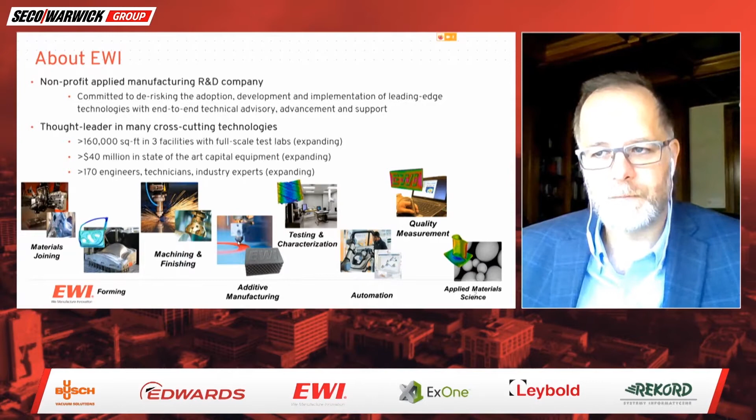Kind of where we come in is, people come to us with their product requirements, and then we help them select the process, select the material, all the post-processing, including the heat treating, secondary machining, finishing, as well as the NDE techniques on how you are going to inspect these parts afterwards. And really, with additive manufacturing, you need to think about all these things to get it to work well.

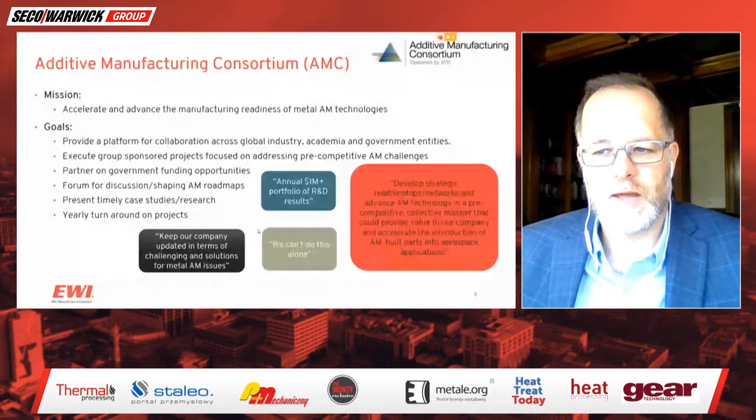We also have an additive manufacturing consortium. This is a group that I run, a group of member companies. We've been going for over 10 years now. Started with aerospace, and had a lot of other industries involved as well. We network and we do research projects together, and so it helps de-risk some of those early stage challenges, especially around metal AM, and so that's another area that we get involved in.

So talking about metal AM, one of the big misnomers with metal AM is it started yesterday, right? If you listen to the media, they're all about, hey, it's early, it's only been around for a few years. Well, no, metal AM really started back in 95. Plastic AM was even earlier than that, back in 87 or something like that. So huge changes over the years, and I would say metal AM has really started picking up speed over the last 5 to 7 years or so. That's when companies started to look at using it, and it's still early stage, and we're going to talk a little bit about that throughout the talk today.

We'll start off with the one that's the most common. You've probably heard of DMLS, direct metal laser sintering. This is one of the ones that gets the most media press. It really is being utilized the most at this point. Basically, you have a layer of powder, a laser solidifying that layer, lower the tray, spread another layer of powder, and build it up again and again. So you're really just welding those layers of powder on top of each other.

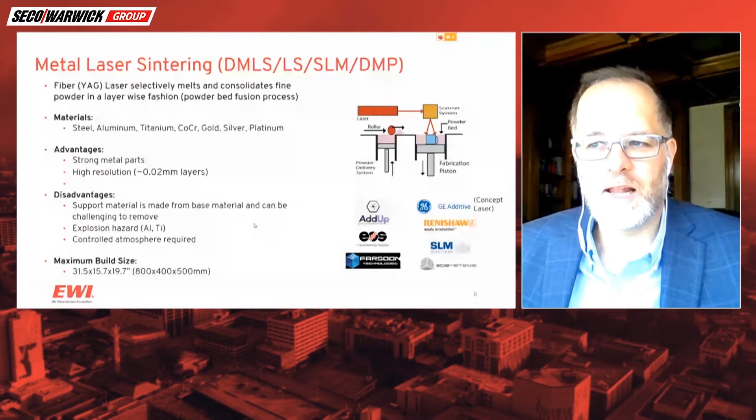Things like dental implants, though, many of those have been printed for the last several years, and that's the way they're producing them now. It's just more cost effective, a better way to do it. So powder bed fusion is definitely an interest to a lot of people.

The other one is extrusion-based material, or binder jetting. And Oliver's going to talk a little bit more about binder jetting, so I'm not going to go into the true binder jetting, but one of the new realms that has come out is this extrusion-based metal. So it's using similar principles to Oliver's ExOne technology, but this is extruding out a ribbon of material.

So imagine like a weed eater cord, but in this case, you've got metal particulates spread inside that plastic binder. And basically, you're just laying that part up layer by layer, and then you go through all the sintering, heat treating processes, just like you would have to do in a regular binder jet process. It's had a lot of media press recently because it's not got hazardous powder, but it's not going to be as strong a part. You're going to have more potential to break between the layers.

The other challenge with this technology is it also builds with a lattice structure inside it. Many people don't realize that. So it's not building a solid part, especially if you have a very beefy part. It's just building a lattice. And so, is that strength going to be representative of your final part? May not be. So you need to think through those things.

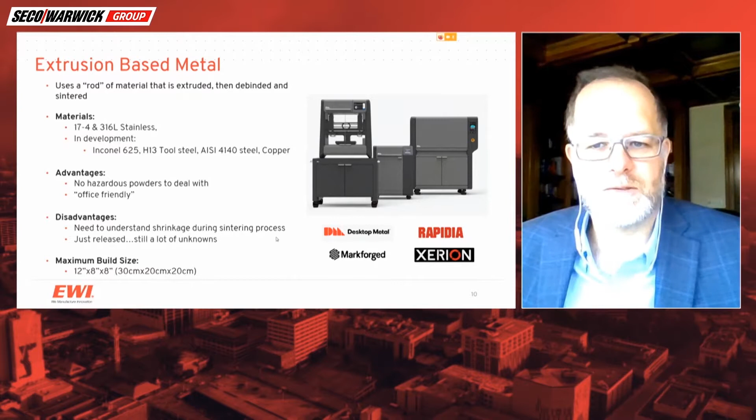Just a couple examples of some of those extrusion or binder jet processes. Parts also do shrink, and Oliver, I'm sure, will talk about that as well. They do shrink, so you need to account for that, about a 20% shrink. But it's very similar to regular powder metallurgy that we're somewhat familiar with.

This is another technology that's new. This is one that actually EWI developed, and we spun off a company called Fabrisonic. This is where we're laying up thin sheets of a film. So basically, imagine just a little wee thin strip, and then we're ultrasonically welding it onto the layer below. And then you build up another layer, do the same. In between those layers, you have the option of CNC cutting to cut out your shape or your geometry.

Big advantage is there's no heating involved here, so you can easily embed electronics into it. You can mill in slots and embed sensors or other items. You can also bond a lot of different dissimilar metals, which really does help and is unique. A lot of the other technologies can't let you do that.

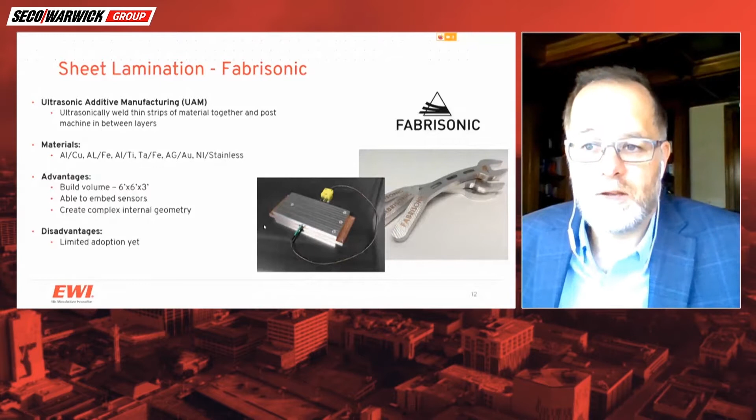Material jetting. This is a new technology. It was launched back in May of 2016. They were at Formnext last year. They're starting, but it's still relatively new. It's called NanoParticle Jetting. So basically, it's based somewhat off the PolyJet technology that was used with plastics for years.

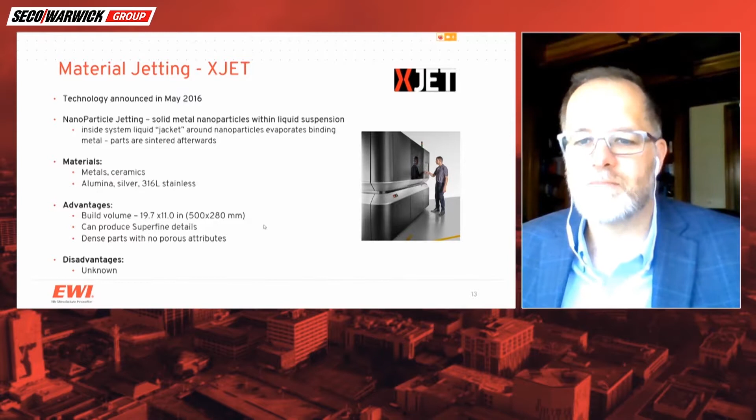They're using an inkjet print head that's basically spraying these nanoparticles down, and then you're sintering the parts afterwards. It gets you really, really fine resolution parts, but they're relatively small. So depending on the geometry, it could be a fit for what you're trying to do.

Material jetting, this is another one. It's a slight variation of material jetting. This was originally announced by a company called Vader, which was bought by Xerox. And Xerox has just now re-released that product at Formnext last year. And it's called MagnetoJet.

So basically what you're doing is you're depositing an aluminum wire into a 1200 degrees Celsius ceramic chamber, and then it's changed into a molten state. And then you magnetically pulse it, and you get that droplet coming out in a very precise manner. It has potential to build at a much faster rate than some of the other technologies, and uses that low-cost commodity wire, so it has a lot of potential. How does it work?

We don't really know yet, because I don't know of anybody that has a machine yet. It's still in that early development stage. And now that Xerox has it, I'm sure it'll come to fruition. It's just a matter of seeing how that technology comes around.

This is another one, Joule printing. So I'd mentioned Digital Alloys that supplied that initial chart. This is one where they're using essentially resistance heating. So you're basically feeding a wire, and then through resistance heating or resistance welding, building up that layer. And it allows you to move continuously and fairly fast. So you get very fast build-up. They also have a camera system that lets them do some closed-loop control to optimize their build parameters.

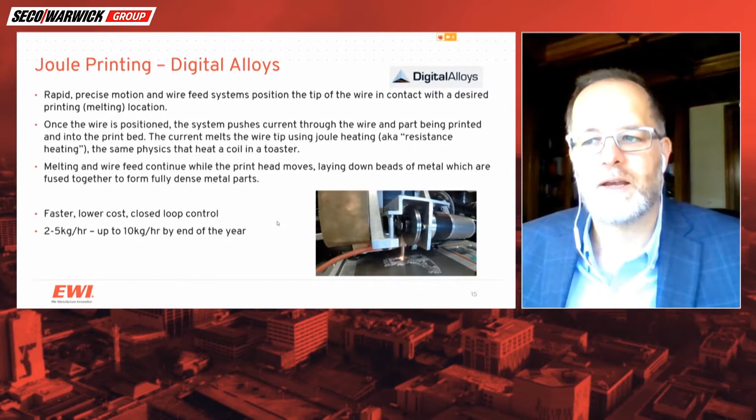And so, again, fairly early stage. They're not planning on launching till late this year, early next. May have changed a little bit with COVID. But again, high build rates, up to 10 kilograms per hour. And I'll talk a little bit about the trends, and that's definitely one of the trends, trying to get faster build rates for these technologies.

Layered powder metallurgy. This is one that Stratasys announced at Rapid 2018. They've been somewhat quiet about it over the last few years. I think it has a lot of potential. They launched it, but now they're really trying to get this technology to work. And we don't know a ton about it. We know that there's a printing stage, there's a compression, compacting stage, but it's meant for aluminum components.

And it's supposed to be very fast, 9 times faster than laser powder bed processes, and relatively easy support removal. The support just kind of falls off the parts. We don't know a whole lot more about it. We think it probably has to go through some sort of a sintering stage. So it's sort of like a binder jet process. But again, there hasn't been a lot of information.

If you Google it, you can probably find a video that kind of explains it a little bit. But again, it's very early stage, but has that potential. And there could be potential for production type volume. And that's really where we're seeing a lot of these metal technologies moving towards.

Cold spray additive. This is another new technology. So SPEE3D out of Australia, they're one of the ones that have been most focused with it. And they provide very fast deposition rates. When they're talking build times, they're often talking in minutes, not in hours or days like we often do in laser powder bed. And so it gets you a near net shape, but does typically require post-machining.

So it's very similar to a lot of the DED processes, or directed energy deposition processes, where you're feeding a wire, you're feeding powder. But you can build very, very rapidly. The other is this technology allows us to build with things like copper. Copper in a lot of technologies is very hard to build with. The SPEE3D system works great. And so you can see a couple examples here.

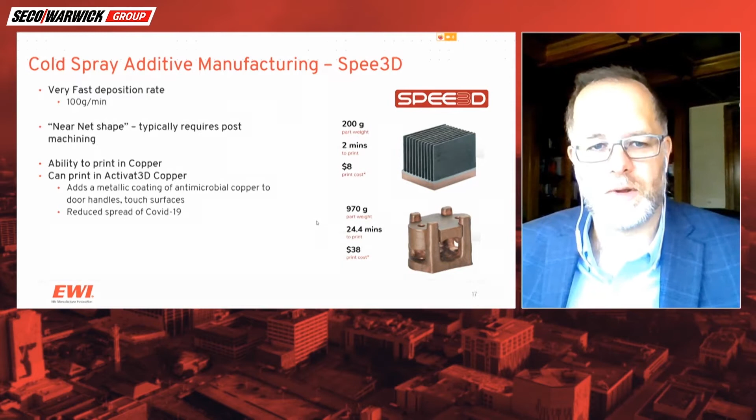So for the last part of my presentation, I really wanted to talk about the challenges and trends in metal AM. This is where most people get involved, get excited about. There's a lot of media buzz out there about what the trends are, but so many people get confused: is this something that's viable? Can I do it?

I just went through really quickly there 3 or 4 technologies. Those are some of the new up and coming technologies. Like I said, there's a whole range of technologies, and it's really hard to know which one makes the most fit. But within all those technologies, there's several trends that they're all kind of leaning towards, and that's what we're going to walk through now. The first is standards.

This is what's holding AM back in a lot of cases, is that we are lacking those standards. So how do we qualify it? We have our injection molding standards. We have our casting standards. We don't necessarily have all the standards for AM.

shore up this. So we're basically working together using consortium, using direct research projects, going after government funding together to basically develop these standards. And that's really one of the gaps, right? A lot of people, if they qualify an AM part, have to do it all manually with their own process. If we can get away from that, that's going to speed up the adoption.

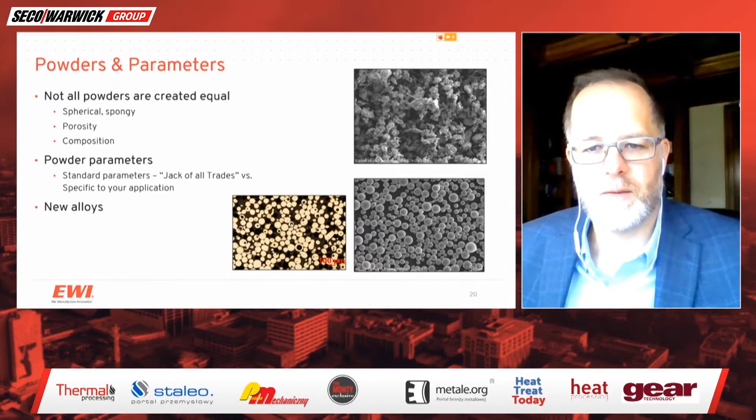Heat treating. This conference is all about heat treating, and I have to mention something. I am not a metallurgist, so I'm not going to go into full detail on it, but this is another area we get involved in a lot. Not me personally, it's our metallurgical team.

And so it's very important to look at your build, look at the parameters, and it does vary a little bit between the technologies. So it's not just you can take a powder and know that you have the right heat treat. You need to take as-built parts and heat treat those and determine what's the optimum one for your process, your material.

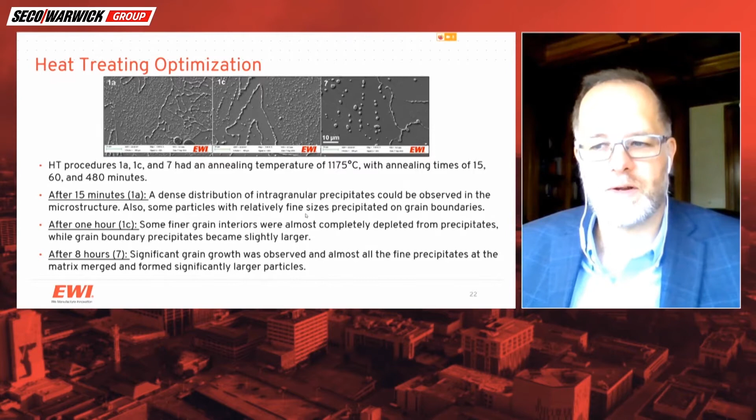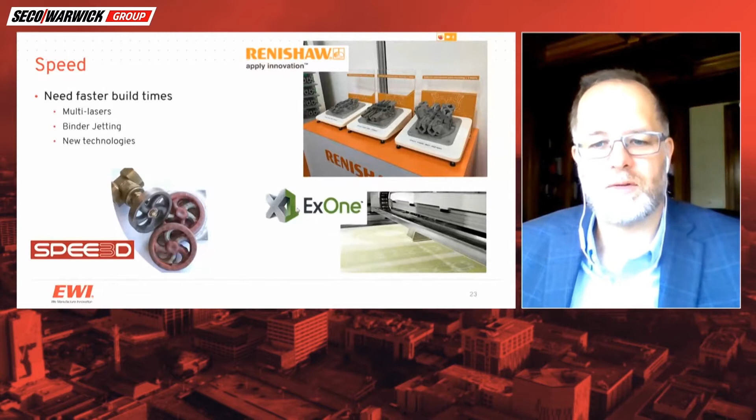Often too, the multi-lasers allow larger builds as well, because you can spread them out over the build tray.

In-process monitoring - this is another area of a lot of research, an area we've spent a lot of research on. If you can sense and monitor your laser powder bed - some of these builds are hours long, if not days long, I know NASA sometimes builds months long - you want to know that something went wrong halfway through, or a quarter of the way through the build. You don't want to find out at the end after you evaluate it that it failed. I'd rather stop the build now and redo it than wait a month, or three weeks, or two days, and then have it fail when I do the post-evaluation.

So looking at those sensors, how can we detect what went wrong? The other avenue is how can you detect it and then correct it moving forward - that's an option as well. We've done a lot of work in some of that, whether for a laser powder bed or for the DED processes.

That we have where you're actually optimizing the laser itself, and it's a great option. There's a lot of research around that. How do you know your machine's right? Or how do you know this machine compares to another same machine of the same manufacturer? Or how do you compare that machine to a different manufacturer's machine? That's the challenge we're getting around on the standard side.

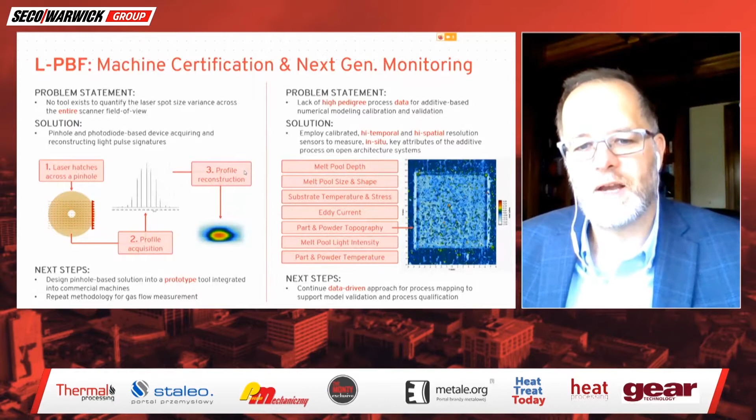And then on the right there is other ways of monitoring. Is there other things we can look at using monitoring systems? Eddy currents, melt pool size, light intensity, powder temperatures. Can we put temperature sensors throughout the build to know where we are? Can we sense the build plate warping or twisting during the build? All those kinds of evaluations will help us know and confirm that we're getting good parts out at the end.

Automation - this is another one. Manufacturing takes a long time to build, but it also can end at odd hours. If you've got a build running till 2 a.m., it would be nice to be able to have that machine automatically shuttle it out of the build and restart the other build without having to have an operator there, and that's one of the trends.

Additive Manufacturing, or Additive Industries, is one of those companies. This is their large machine where basically it'll shuttle it through three or four different stages and completely allow lights-out involvement. When you come back in the morning, you clean up whatever stage it's at, and it keeps running. There are other companies starting to come out with similar automation, whether standalone automation on the side or integrated more like this system.

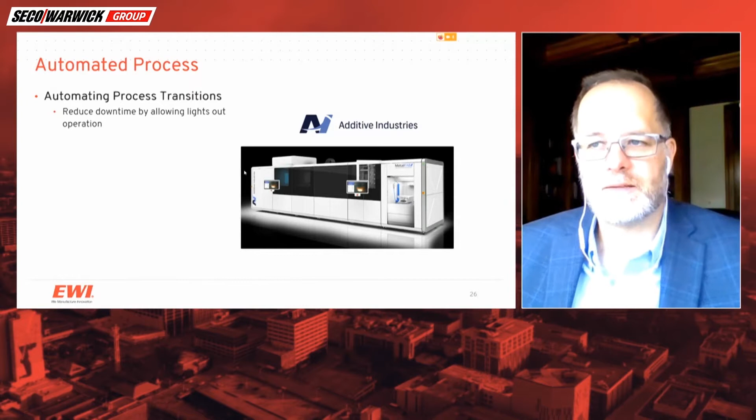Now you've got laser powder bed capability at a much lower price point. Smaller build size, 5-inch by 5-inch by 5-inch, but a lot of the time that's the size parts we're building anyway, so this type of technology can make sense.

We're also seeing more and more vendors come in—some Chinese vendors, some European vendors as well, many getting into this market. As we get more competition and more vendors, I think we're going to see more and more companies come to fruition.

Software tools. Simulation—you're going to see part deformation, there are lots of different simulations you can do. You can determine the residual stresses. Imagine you're building a big solid block up—it's going to warp, it's going to twist. How do you qualify that? How do you know what's going on?

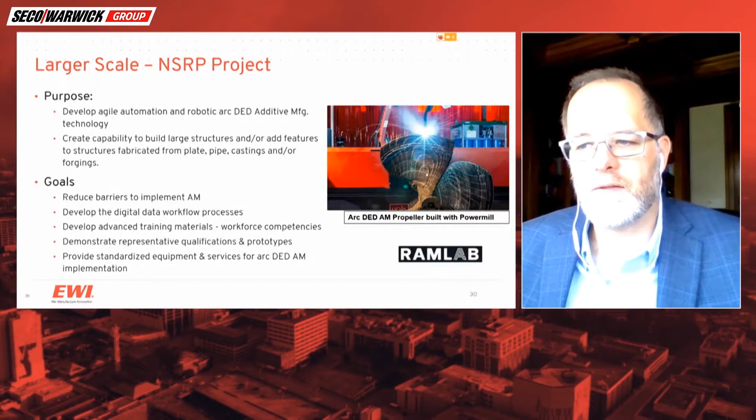We have a large gantry-based system at our facility, and we're in the middle of researching an even larger scaled system. To put it in perspective, this propeller is almost a 2-foot diameter blade. The new system build size is 25 feet by 15 feet by about 9 feet high—much larger parts, but again more near-net shape, not necessarily final build size.

One of the last struggles we have is training. How do you train your employees? Most universities and colleges just don't have good training materials available. Most of the time, if you're at a college, it's a course or a series of courses. We're starting to see some colleges with a manufacturing minor you can get into, and a few looking at additive manufacturing programs, but they're still very early.

So how do you get the people you need? Most companies are having to train employees internally. The other challenge with training is how a company comes up to speed—how do you weed through all these technologies? There are a lot of different technologies out there, and it's a real challenge.

I've been in the industry for almost 20 years, and every time I turn around there's another new technology, another new company doing something slightly different. The challenge is they all call their technologies almost the same name, just a little bit different, so it's hard to know if that's just the same type of technology with a different name.

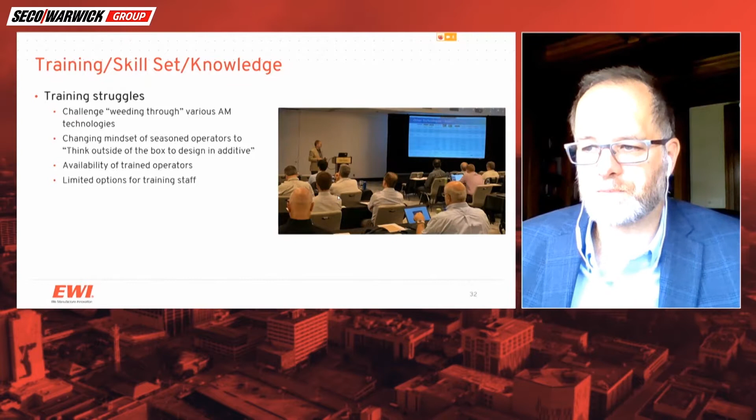In summary, there's a lot I've went through here, a lot of trends. Things are changing very rapidly in the industry. The first thing I can say is don't be afraid to try it. Try and get involved. Can't machine it? Get out, find a bureau - lots of bureaus around the world that will print parts for you.

It's a great way. That's what I started with, right? When I started with Christie 20 years ago, we started bringing in parts. Then we realized we're outsourcing enough parts that it's better for us to bring the technology in-house. Once we brought one technology in-house, we started expanding and bringing all the different technologies in-house. The other challenge people have is they buy one technology and expect it to do everything - not every technology is going to be a fit.

So you're best to fit the technology to your industry for the most benefit. Seek out those knowledgeable experts - companies like ours, and others out there, that can help you determine what's the right fit, what's the right process. Build out those early prototypes.

The other point is get a champion. The companies I've worked with that have had the most effect are the ones that have that senior person within their company who's phenomenal and has really grasped what additive can do, and is then able to sell it through the company. That's really going to help get it adopted. Break down those barriers in your company to allow AM adoption, whether it be cost or structure.

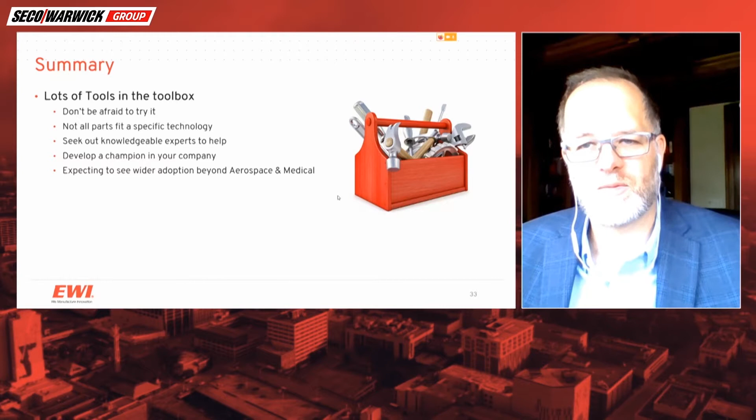It's changed so much in the 20 years I've been doing it - from early prototypes, which were weak parts, to now fully functional parts integrated into production fixtures, metal parts that are fully functional and meet aerospace and medical grades. As that gets more evolved, as standards get developed, we're seeing more and more companies get involved.

I think it's something to look at. If you haven't looked at it, feel free to reach out to me or to others - we'd be happy to help you with that. So thank you.

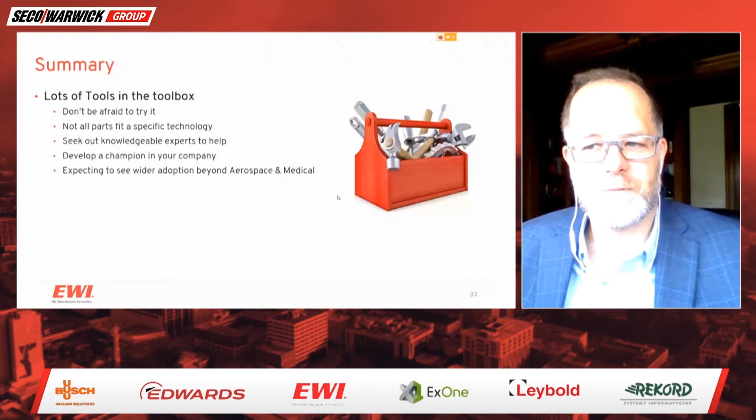Well, Mark, thank you very much for your knowledgeable presentation. There was an astonishing overview of, I believe, the entire technology available in the world. So thank you very much for it. Actually, I've got a few questions about the presentation.

The first refers to the future of additive manufacturing. We were saying a lot about the past, about the present, and I believe the future is quite bright. But in the long run, what do you think? In which direction will it go? Shall it be more a kind of niche technology for niche production, or maybe it will totally dominate the traditional way of production that we know today? Or maybe somehow it will coexist with current production standards that we know. What's your guess about that?

So I don't really see AM completely eliminating our traditional manufacturing, right? It's hard to have AM compete with traditional casting, traditional machining. Again, if it can be produced traditionally, it's probably a better fit to produce that part traditionally. Where AM fits in is where you can combine parts together. You can make geometries that we can't cast or we can't CNC machine. That's really where the fit is. And so that's where I see it being more adopted as more and more people get into it.

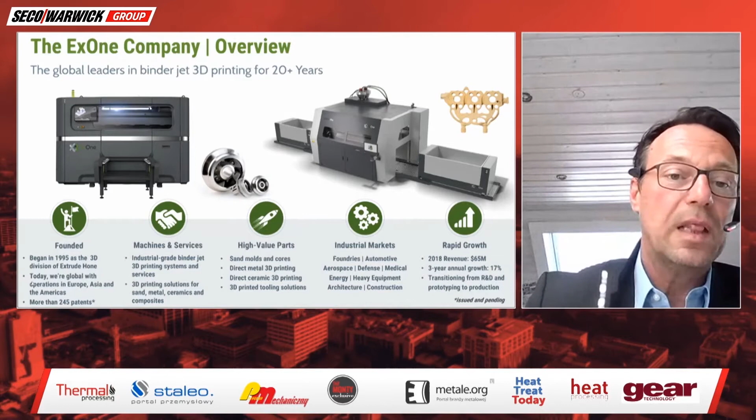We do that not just for metal, we do that for sand printing. On the right-hand side, you see a sand printer, and on the left-hand side, you see a metal printer. And I will talk about that a little more. So these are the markets where ExOne is basically focused on. On the left side, you see 3D sand molds and cores for metal casting. So the printers printing sand and big cores and molds.

And then in the middle, we have what we call direct metal 3D printing. That means really binder jetting into a powder bed of metal. And then the next step is curing, depowdering, and sintering. Then, as it is available in powder form as well, there is ceramics. And as ceramics can be sintered as well, we can print green bodies, green parts with our technology and our machines as well. So these are the three markets ExOne is covering.

Where are we? We are in almost the most important areas in the world. That is Asia, of course. It is in the middle of Europe, that's Germany in that case. And we are present with our headquarters in North Huntingdon. So this is where we have our bases, and the area which we can cover, you can see it's quite all over the world. If somebody is interested, we can cover his needs.

As a decent company, of course, we do have collaborations in place with universities and with other companies, because in additive, I think that is what Mark has shown as well, it's important to understand it's about doing that together. The market is not mature, it's really new, it's a young market. We need to do networking, we need to push, we need to train people and to educate people, and therefore you need a network. You need universities, you need other companies collaborating to make the push, because nobody can do it on his own. That's not possible in that area of applications of technology.

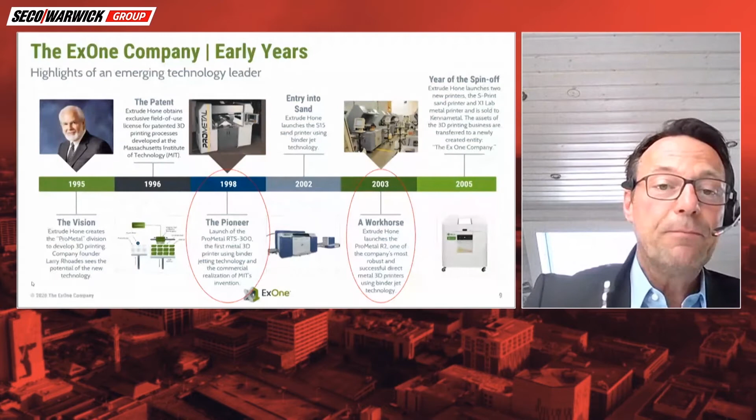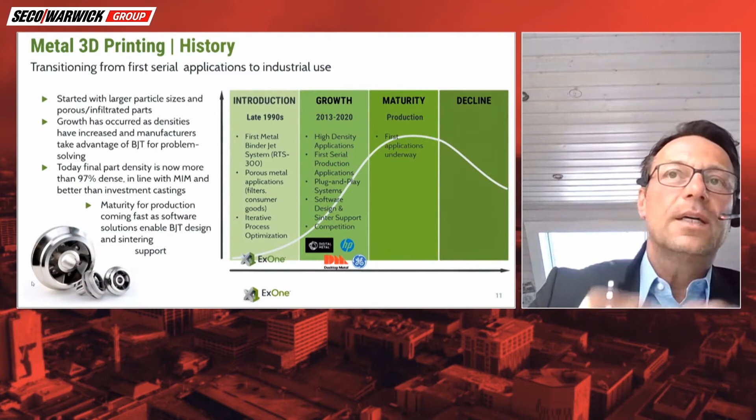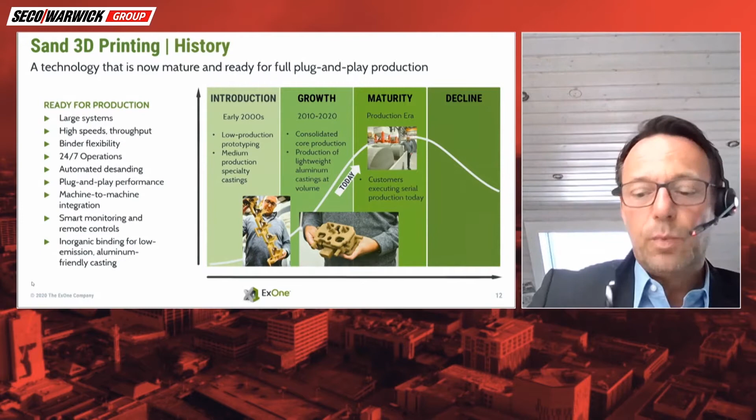Well, the history of metal 3D printing, everybody knows that kind of graph, where it started and where it hopefully will go. And we are not as advanced as we are in the sand business. Sand printing has been around a little longer. You see that we have already reached that kind of maturity. There are machines placed in companies that run almost 24/7 operations. So this is the ExOne company: we build machines for sand printing, we build machines for metal printing.

And how does binder jetting work? A little overview, and a little overview of where it hopefully goes. So basically, we have a powder, we have a binder, and we print layer by layer. So this is the core technology. And of course, it's not as easy as it looks, as always when it comes to AM. But the nice picture here on the right-hand side is, same as Mark has predicted, that we have higher build rates and low operating costs with that kind of technology. There's a big opportunity to grow into the market with that kind of technology.

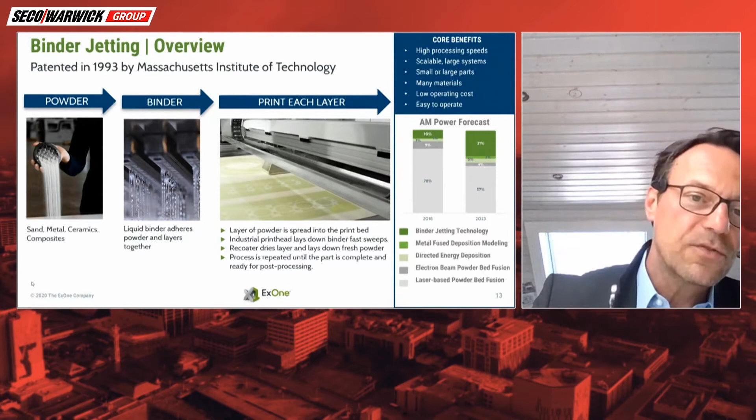With binder jetting technology, there's a lot of space, and there's a lot of education and training necessary to tell people what is behind that technology. And no, it is not replacing milling and drilling. It is a niche in a niche, but if you find the right place, it is a nice technology.

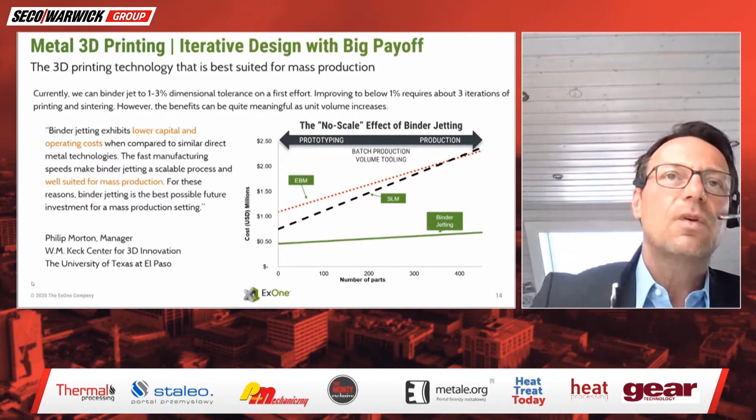Well, of course, most of the people have talked and have seen some of these predictions where metal 3D printing will go, and where is it already ready for mass production? It's kind of still a learning phase. Some technologies are more than others.

Probably binder jetting is a little closer to mass production compared to powder bed fusion, laser-based, or maybe e-beam based. But at the end, there's room for improvement for all of us. There's a big industry out there which hopefully will understand what is the advantage and the capabilities of that kind of technology.

Let's go through. Mark has started to tell you already about additive manufacturing or 3D printing. That's a little different. If you ask Google, hey, Google, tell me what is 3D printing, then you get that kind of pictures. That means it's more plastic related, not that much metal. The interesting thing is that if you go, hey, Mr. Internet, what does additive manufacturing mean? And then all of a sudden, you get more pictures and results, hits metal related.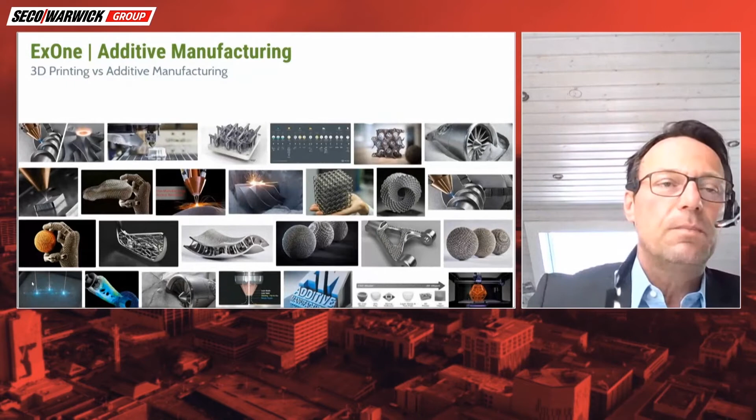Just by giving you those two simple examples shows, I think, that the landscape of 3D printing, of additive manufacturing, is so diverse. There are so many technologies. I'm really impressed by how EWI is doing it, because there are so many new technologies coming around the corner each day, and you need to cope with that in terms of, as Mark said, is there a difference? Is it the same name almost, same description almost, but a little difference? So it's a big landscape.

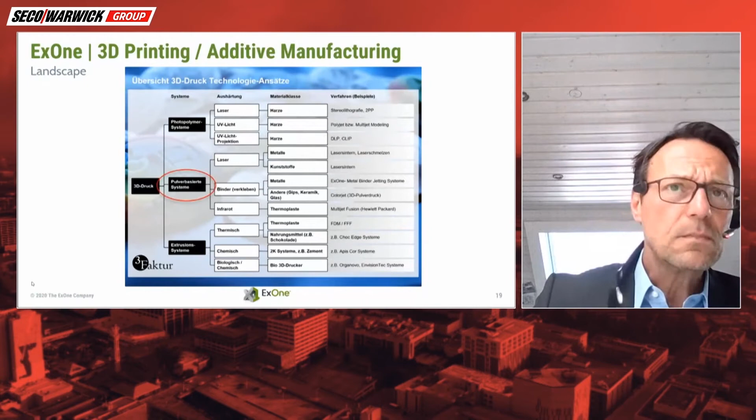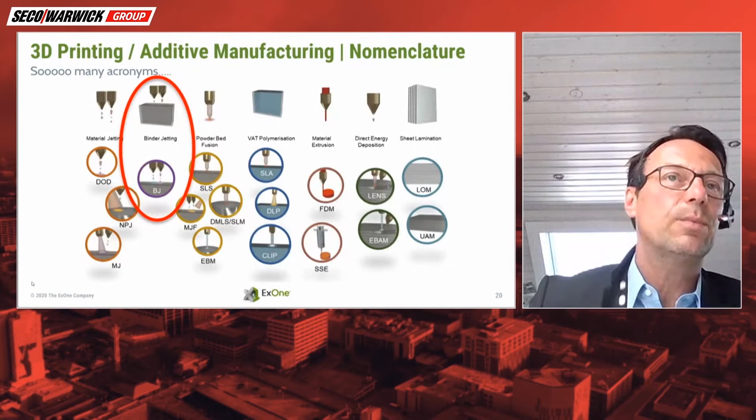At the end, what we are going to concentrate on today is powder bed combined with the binder jetting technology. There are so many abbreviations, acronyms flying around for binder jetting, powder bed fusion, and personally I sometimes don't know each and every one of them. So we are going to concentrate on binder jetting, and there is much more out there, which is good. On the other hand, it's sometimes hard to explain where the differences are, where the advantage or the disadvantage is. Let's go for the binder jetting technology, most simple.

There's a powder bed and there's a print head, which is printing the binder into the powder, the binder which is kind of a glue, gluing together the particles. And as this is kind of too simple, I will show a little video based on the sand printer, but it gives you a flavor of how the process works. What is important is to understand the recoating system, how the recoating is going to be done, and to jet a droplet of binder specifically, precisely where you want to put it into the powder bed.

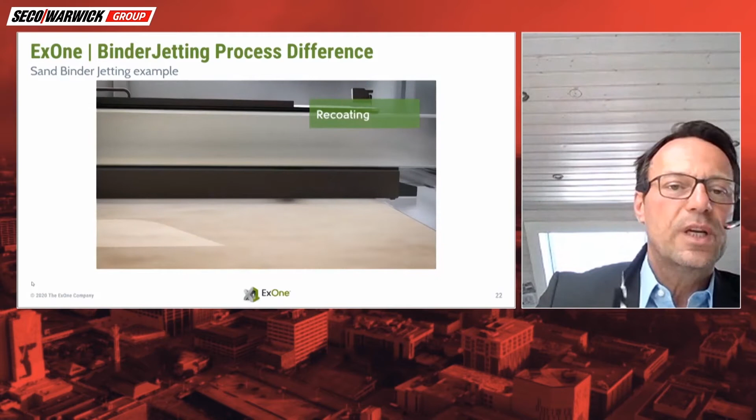So the first step of the process is the recoating process. We need to put layer on layer, layer by layer, and of course that video is kind of artificial because the particle sizes are all the same, but it shows how it works, that we put a layer of powder on top of the other layer of particles.

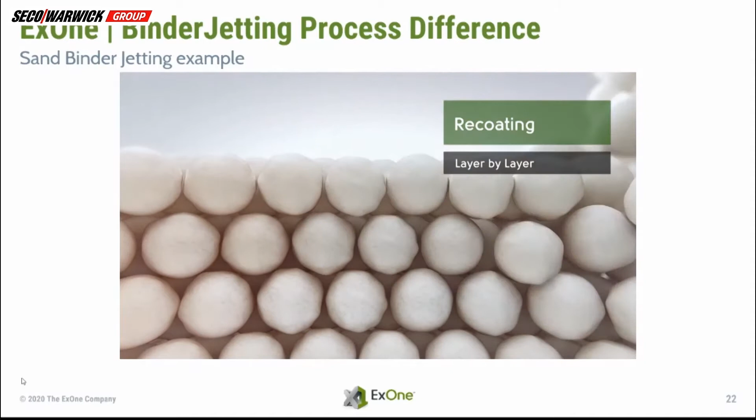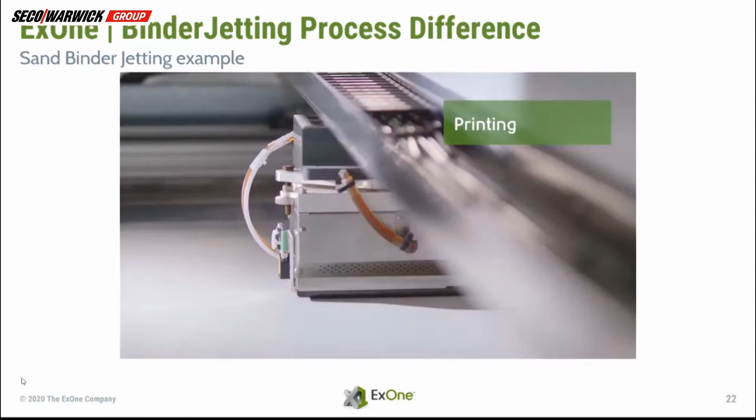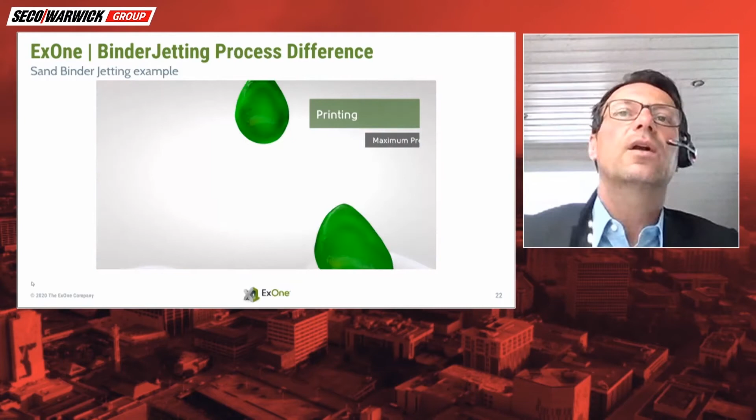The next step is then firing the right amount of droplets, the binder, on top of that layer, at the right place as we want it, and this liquid binder is jetted by the printhead into the powder bed, and it just kind of glues together the single particles to a green part, which gives us the ability to cure that green part, and then we go into the sinter process to sinter that green part.

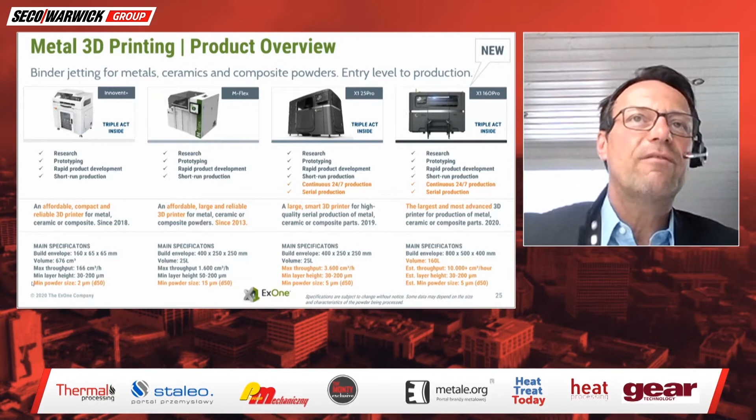Basically, all of them have what we call the triple ACT. That's a technology I will explain some slides later, which enables us to spread out, to recoat the powder the way we want, and to have the same technology in the R&D machine, which we call Innovent Plus. And then we have the same recoating technology in our production machines, which enables scale-up from R&D into production pretty smoothly and pretty linearly, which is our target: to give customers the possibility to translate their R&D results into production.

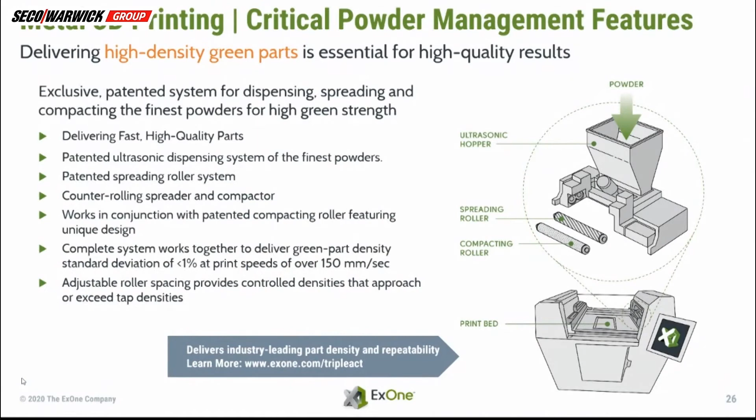The ACT technology enables us to handle a powder, and we have learned by Mark's presentation there is a lot of difference in powders, and I can tell you he's so right. The powder people are more familiar with, the most optimal powder, is very spheric. There are no satellites, it's flowable, and all these things.

But at the end, if you want to go into a more productive way of producing with binder jetting, you try to go for MIM powders, metal injection molding powders, which typically have a D90 of 22 microns. So that means it's quite a very fine powder. And physically, fine powders tend to stick together. The particles are sticking together. They are no longer that flowable.

And therefore, we have invented this kind of technology, which enables us to recoat even very fine powders. So we have an ultrasonic hopper, a spreading roller and a compacting roller. This combination of ultrasonic hopper and the two rollers gives us the possibility to recoat even a very fine powder. And this is of importance if you want to decrease the cost of the powder in the future, because MIM powders are available, as metal injection molding companies use tons of that material very often, so we can use the same powders with our technology.

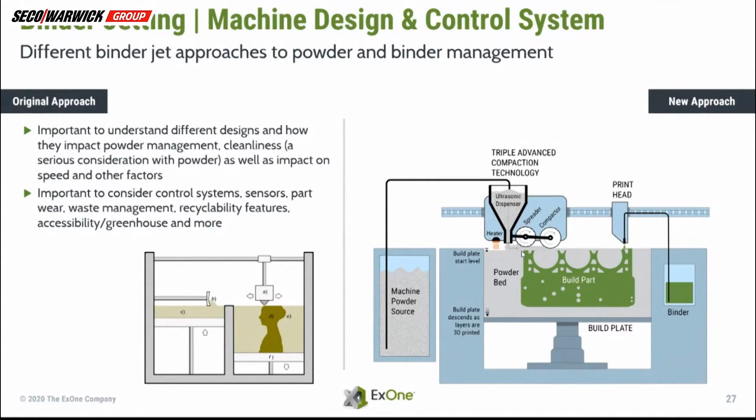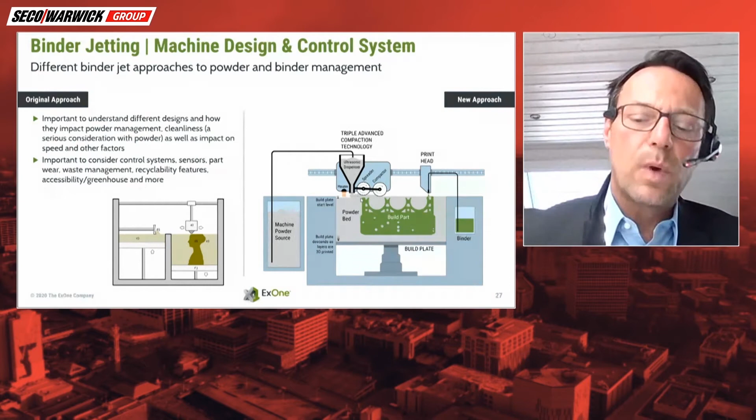And it's a very constant and very homogeneous way of spreading out and recoating the powder, which is important if you consider that at the end we will build a part which has to go through a different process, which is the sintering process. And the better, the more stable and more homogeneous the green part is, the better the result is going to be after the sintering process.

Let's have a quick look at the machines as such. The R&D machine we call Innovent Plus. It has a small build room, but most of the time enough to make a small part, to do the first tests, to do the development work with one or the other material. And the nice thing here is that you can change over the materials quite easily. If you go for an iron-based alloy, or you want to change to a nickel-based one, you can change with a clean time of less than 2 hours.

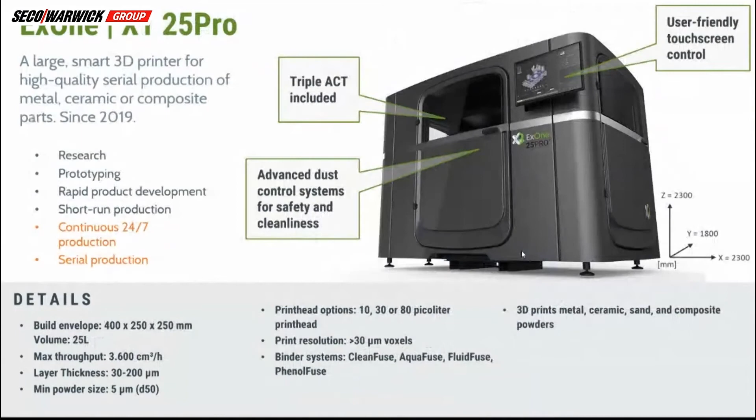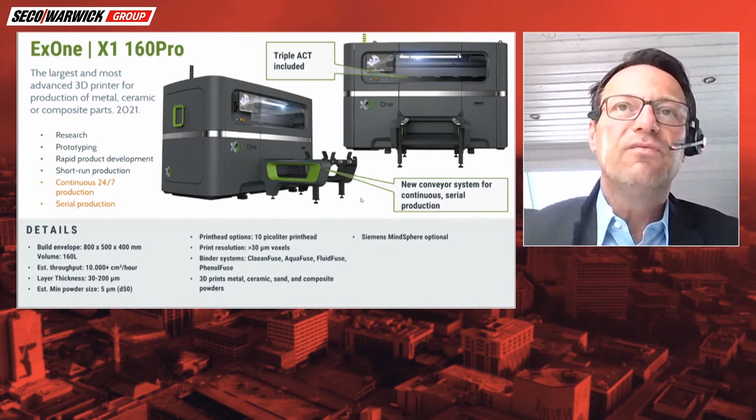The big machine, which we call 25 Pro, the 25 is related to the volume of the build box, which is in that case 25 liters. And this is really for mid-size production of parts. If you want to go one step bigger, we have another machine in place, which we call 160 Pro. As I said, 160 liters is reflected by the name. So that's the build envelope, the build volume. That's really mass production, high volume production in binder jetting technology.

I still want to mention the machine which is called M-Flex. That is more for people who want to build maybe filters, where you have a more porous, not a highly dense material at the end, and then you can cope with that challenge using the M-Flex as well.

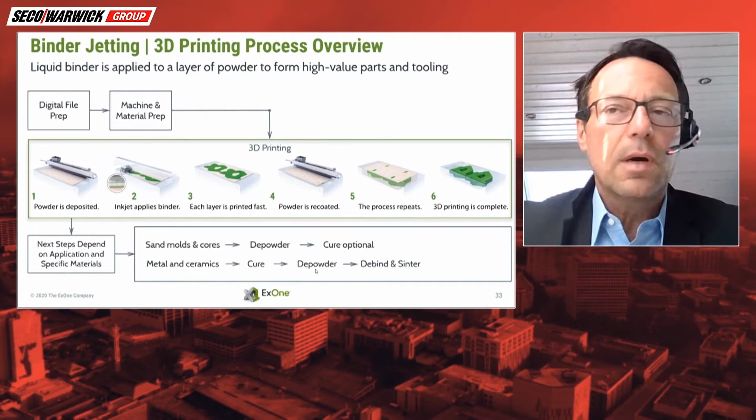So the core business of binder jetting of ExOne is the binder jetting technology, how to print a part, how to handle that process. And then the next step, the sinter step. As the MIM industry is doing sintering since ages, there's a lot of knowledge out there, but it's well known that sintering is not as easy as it should be. And there's a lot of experience necessary to sinter a part properly. As we have heard, because there's shrinkage in place, there's different reaction of the part given by gravity and other things. We will talk about that a little later.

And here, most of the time, you need a consultation and some backup and support from the furnace community, because it's really depending on which material you want to sinter. Is it a 316, so a stainless steel, or you are more interested in nickel alloys, or maybe in ceramics? So there's a lot of room for discussion at the end. It depends really what material you want to produce.

But let's go back to the first step, which is the digital preparation. Everybody knows that AM starts with a digital file, an STL file, and to create such a file, that's probably not the problem nowadays. We have a lot of computer power available. We can do that. More difficult to me is to utilize that new power. In the old days, in the classical approach, we did the CAD, and then we say, okay, well, we need to go back and redesign. But actually for AM, we could use computer-aided engineering. And so we have to simulate already ahead how the part may look like to accomplish all the tasks.

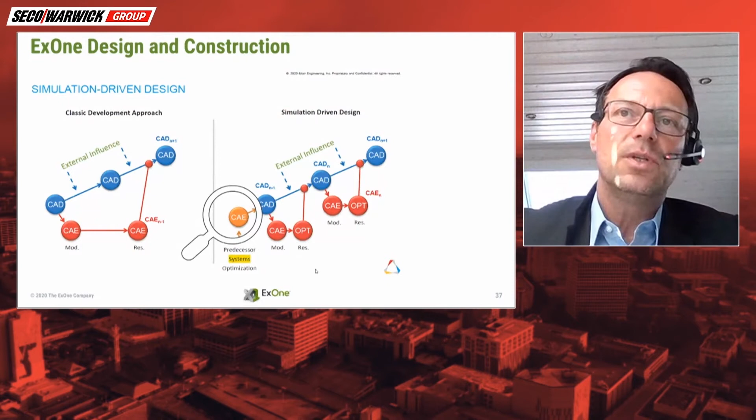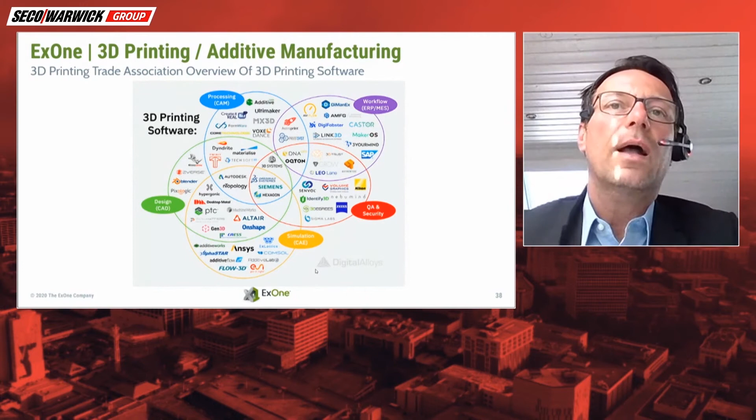The other thing is that software is a thing, and as you can see here in that screen, coming from Digital Alloys as well, there's so many softwares and so many approaches that bring all this additive community together, and it's to pick and choose what is the best one. Where am I gonna start? This is sometimes not easy because it's so complex. There is not a one size fits all available, but you have to go through that, and there's lots of companies out there to help you go through, because starting from scratch, it's not as easy.

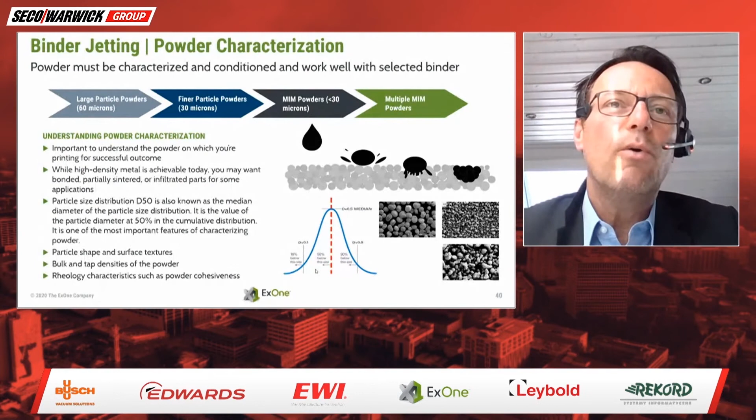Let's talk a bit about the materials. The beauty of binder jetting is that you can use almost every material as long as you find somebody who produces a proper powder. In the early days, we started with large particle powders. Nowadays, we are able to go for, as I said already, MIM powders, so very fine powders. And why is it important and why do we go for finer powder, smaller particle sizes? Because the sinter process afterwards, if we talk about metals, is a bit easier if it's finer powder, but then on the other hand, it's not as easy to recoat them.

So here we are back again to the technology we have embedded in our machines, which we call ACT, because we want to go as fine as possible in terms of powder particle size, but still we have to cope with the hurdle of being recoatable. Can the powder be recoated in a proper manner? So that means the powder is an important part of our process. And I'm really glad that Mark pointed out that powder is not just powder. You see here some pictures as well. There's very spherical powder. There's a more edgy powder.

All this shape of the powder will influence how the droplet is going to be penetrating the layer you have put on top of each other. So it's important that you understand what raw material this is. It's not just whether it's a stainless steel or nickel based, it's also how the powder size and the powder particles look like.

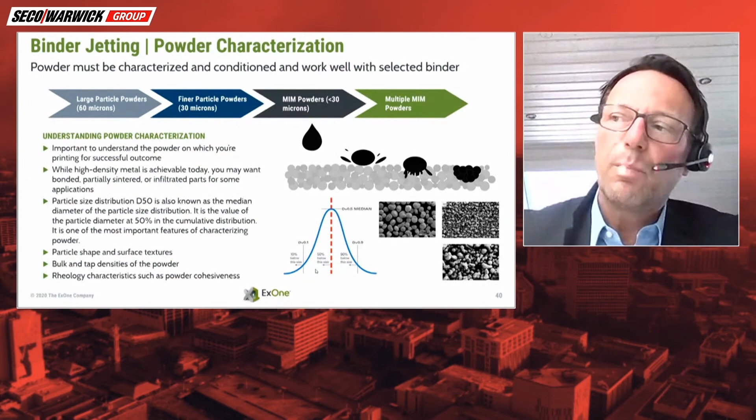Therefore, we as ExOne have defined a way to test the compatibility with our process, with some little methods, like how the particle size distribution looks, or how the flowability of the powder looks. If you look into the specification of powders, you will easily recognize there's a lot of things which are maybe over sophisticated, but you need to really understand what raw material you put into the machines.

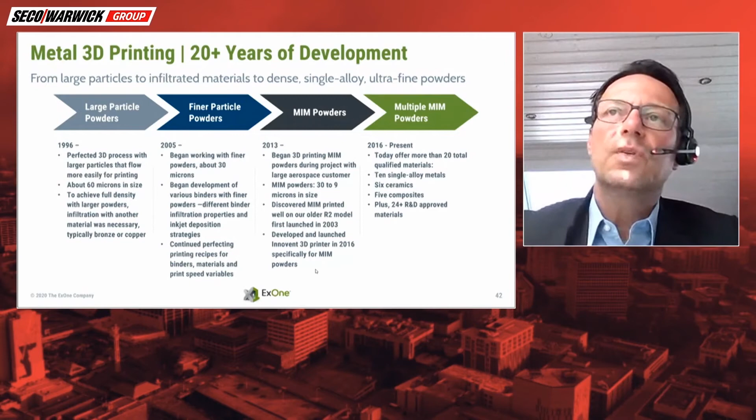And that's not just with binder jetting, it's the same if you go for powder bed fusion with laser or with electron beam. So ExOne went through this variety of different powder particle sizes, and now today we are able to use multiple MIM powders, which gives us a very broad material portfolio to choose from.

We have defined some levels of powder or material qualification. If we as ExOne qualify a powder through a third party, we call it third party qualified. That means an independent laboratory has tested all the steps and properties of that powder through our process. And if we can meet the typical specifications or standards, we reach the MPIF standard 35 with the powders or materials we have qualified as third party.

Of course, there are other powders. We have customer qualified materials, which means a customer of ExOne has tested and produced powders and materials, coming to a proper result. So the customer has proven by his process, by his choice of material, that it works. And of course, there's R&D qualified powders and materials.

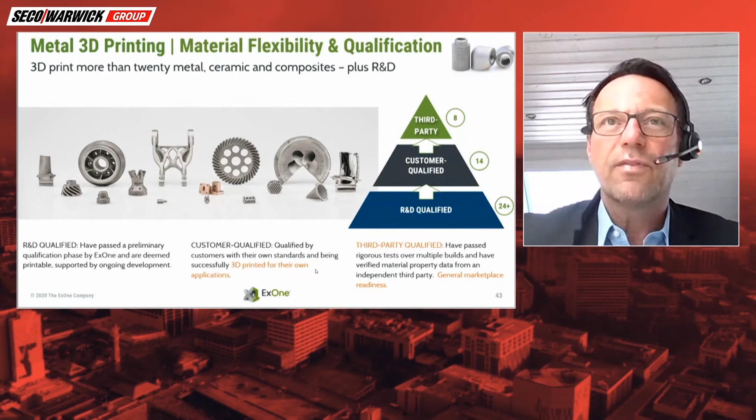There are so many of them, which explains why not every material existing can be a fully third-party qualified powder. Because if you're going to do that, it's a report by an independent company telling us this is tested by tensile, by hardness, by impact, and all the other things that is really committing, tested against the MPIF standard, and if we are successful by doing so.

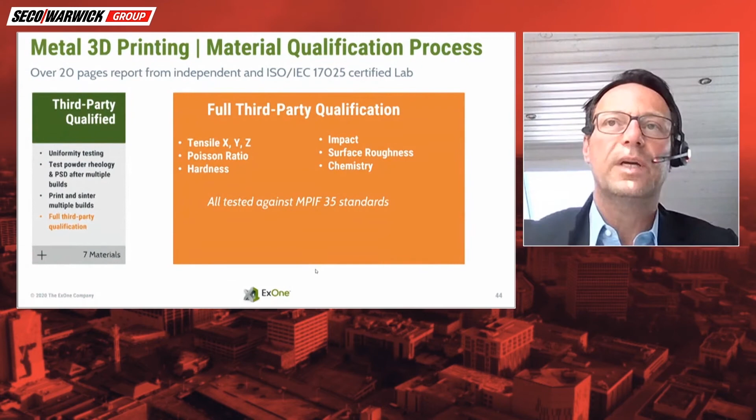Third party qualified, for instance: 17-4 PH, 316L, M2 tool steel, and very new is the Inconel 718.

If we have a quick look to customer qualified materials, then there's by far more to come. There's the ceramics, and beyond even metal ceramic composites, silicon carbides infiltrated with silicon.

So this is sometimes the beauty of binder jetting, and on the other hand it's a burden, because to pick and choose the right material for the right process, for the right application, is sometimes offering so many opportunities and so many choices that it's not easy to make your own judgment on what is best.

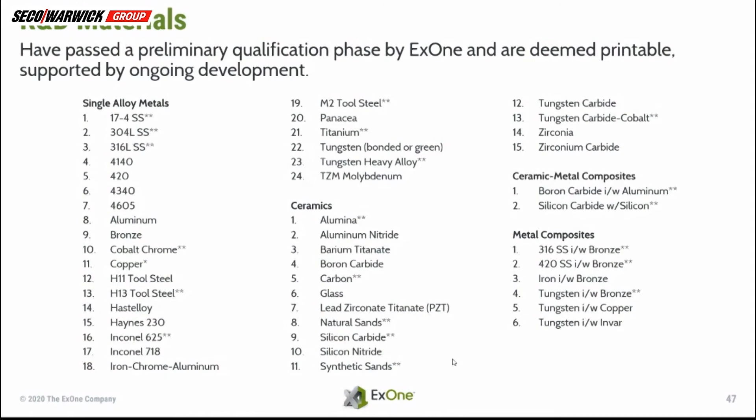Here you see just a small number of parts made of metals. That's not everything we have tested - we have tested hundreds of them, but it depends on what the customer needs. Sometimes it's his own developed alloy, or it's a very standard alloy, like maybe a cobalt chrome or an H13.

You will reach, as I said, the typical properties of the metals, assuming they are produced by a MIM powder or a MIM process. This goes for all the others as well, for the M2 steel.

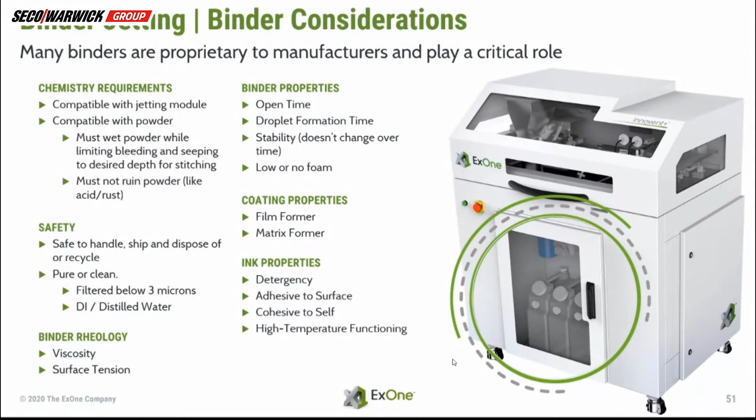One thing, if you talk about materials, is the powder, the metal or ceramic, and on the other hand it is about the binder. It has to fit together. So it's not easy - it sounds sometimes very easy, but you need to find the right binder for the right material to achieve the best properties you want.

This is why we as ExOne have 4 binders. Every binder has its pros and cons, depending on what is your target application, what is the alloy you want to print, you want to sinter, and what is the application behind. So we have 4 of them, because we have understood that there is no one size fits all.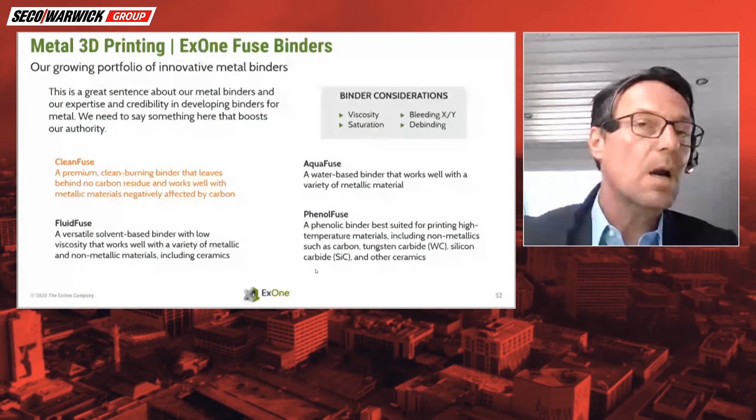One binder giving all the properties you want - and probably there's by far more possibilities to develop other binders. But at a certain point in time, you have to decide whether you want to stick with a solvent binder or a water-based binder. Some even may choose the phenol binder because they want to go for a tungsten carbide. Well, the printing as such, the video has explained it properly how that works.

But it sounds very simple, but sometimes it's not as simple if you go through the process. There's the drop formation, so how the firing of the printhead works, and how big the droplet has, and then how it hits the surface of the powder and starts to penetrate. Because you want to make it penetrate only as deep as you want it. In the Z direction, we don't want it to bleed out. The same comes to wanting to form a voxel and not bleed out left and right. This is the difficulty to do binder jetting in the right way.

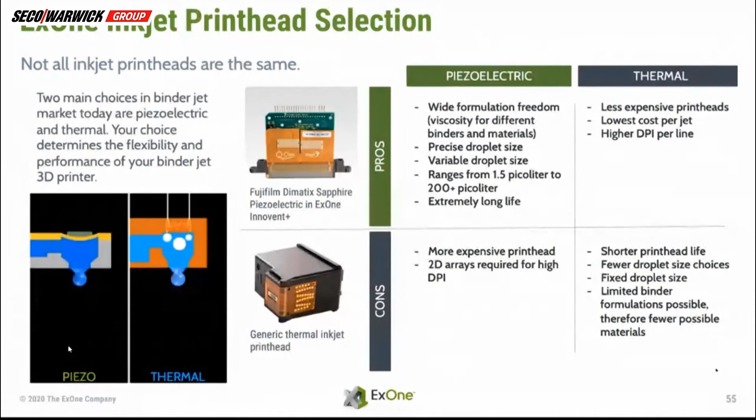What we have decided is to use piezo technology rather than thermal technology for firing the droplets into the powder bed, because we think we get a more precise way of printing, or creating our droplets.

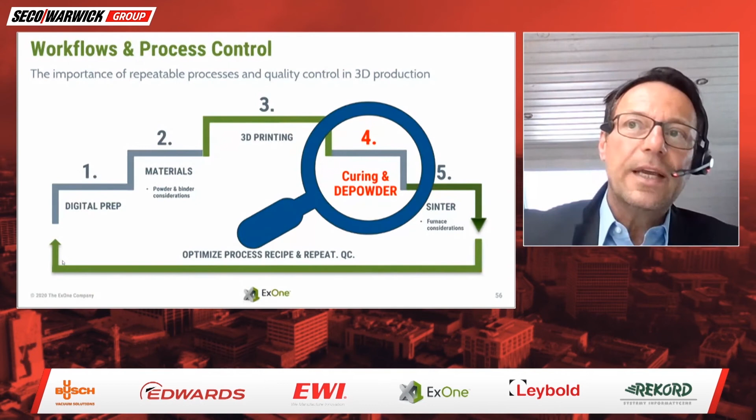Curing. And now that's going to be curing and sintering. You can do binder jetting, but without the depowdering, the curing, and the sintering step, binder jetting, the green part means nothing. So you need to post-process. You need to debind and to depowder and then sinter a green part which we have printed. It's important to understand that this belongs together. One thing is printing, the other thing is then the depowdering and the sinter step.

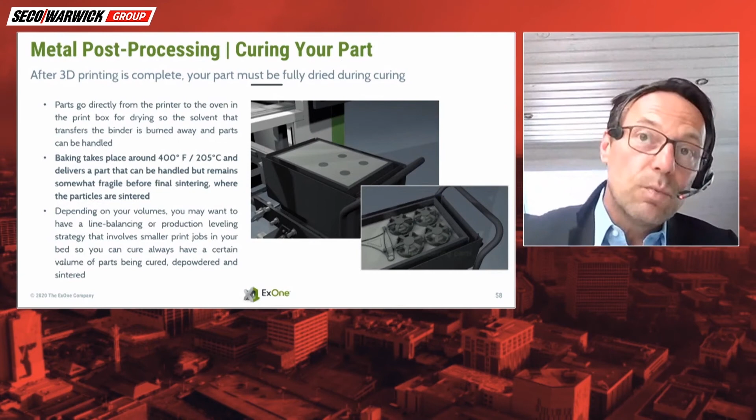So curing your part is necessary to cure the binder, so curing the glue between the particles to make a solid part which you can handle. It's still not solid as you think, because it's in that green state. That means it has a tensile strength of something like 6 to 8 megapascals, so it's kind of fragile. And as we don't want to have a fragile part, after the depowdering process, we go for the sinter process.

And why is depowdering so important? Of course, because if we go into the sinter process, each and every particle which is in the part, if there's remaining powder, it will be sintered to a solid block. So we don't want that. So we have to depowder in a proper manner.

Sintering. Of course, the furnace consideration is very important. I'll give you an example. If you choose to go for stainless steel, and you think in the early stages you want to start printing and sintering a 316, and the next day you think about maybe going for a 17-4. I think that sounds similar and even very familiar, but if you want to achieve the best possible property of a 316, you should go with hydrogen or high vacuum into the sinter process.

And there's so many ways and combinations of material and the way you're going to sinter that you need an expert telling you, like the furnace companies, like Seco Warwick, how to do that. It's not us as machine builders. As we build the printers, we can do the binder jetting process, and for the qualified materials we know how sintering works. But if you choose and pick another material, that's a different animal, and we need to find out how to sinter that in the best proper way.

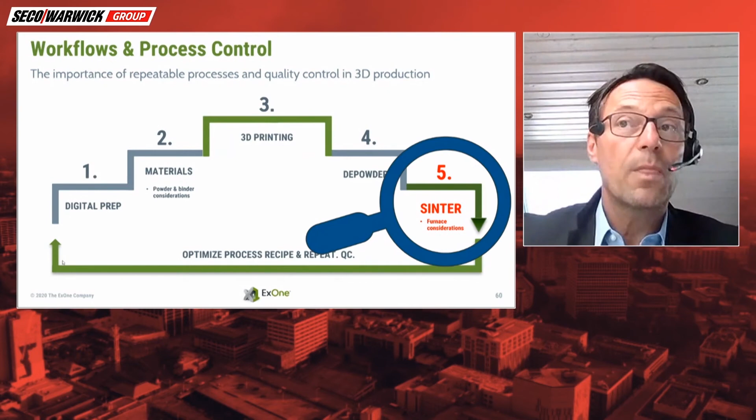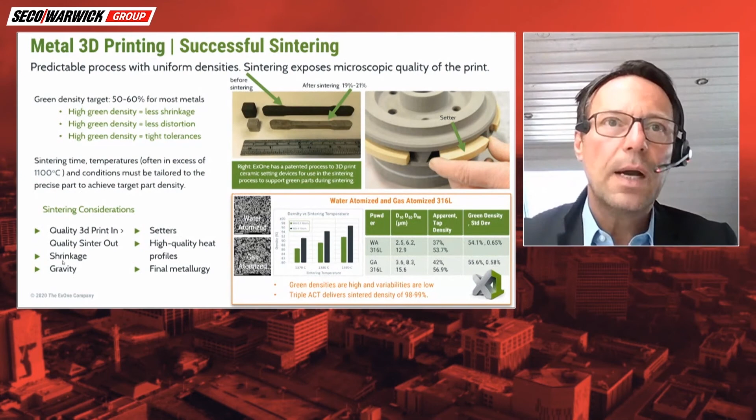Everything which comes along with shrinkage is as well belonging to how you start. That means how the green part, the green density, looks like. And this brings me to the point why we have decided going for MIM powders, because there we can reach a higher green density that brings us less shrinkage and, even more important, tighter tolerances and less distortion. On the other hand, you need to already consider before you print how that distortion might look like while you go through the sinter process.

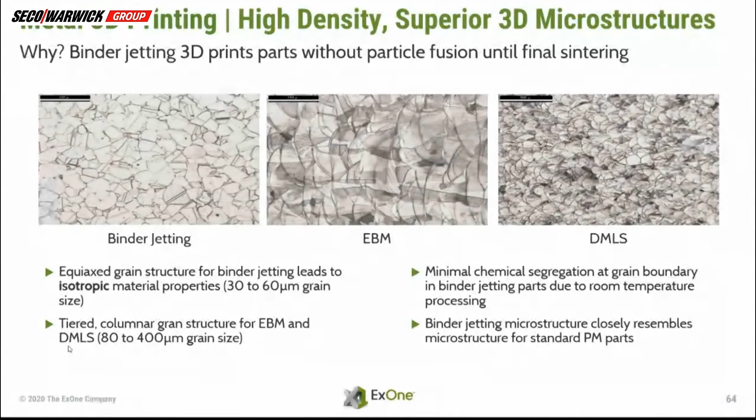And an advantage on one hand is, of course, for the binder jetting technology that we don't apply heat like the powder bed fusion with laser, which is welding, little layer by layer welding creates a different grain size or a different grain structure while doing so.

And with binder jetting, there's a different approach, and the sinter process afterwards is different too, without the temperature and the potential segregation which might happen in the grain size build.

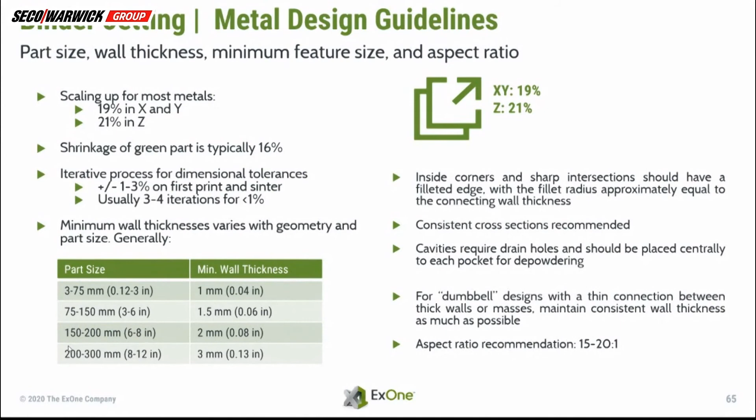There needs to be design guidelines, of course, because it's not one in, one out. That means we have scale-up factors we need to consider for the printing and shrinkage. You may now understand why it has to be the right part dimension, the right design for binder jetting. Not every design fits being binder jetted.

This is where we as ExOne try to have close communication with our customers, to see if that fits their needs. As Mark mentioned, not every additive manufacturing process covers the needs of the customer. If you've done it by milling and drilling, maybe you should stick with that because it's cheaper. But if you go for casting, maybe you're still going to cast it. But if you want to add functions or tweak some designs, then this technology is the one you go with.

ExOne, we do have a printing service. That means a job shop based in the US, so in the Americas, people can order printed parts from ExOne, not just buy a machine to print themselves. We also offer a metal 3D printing solution shop.

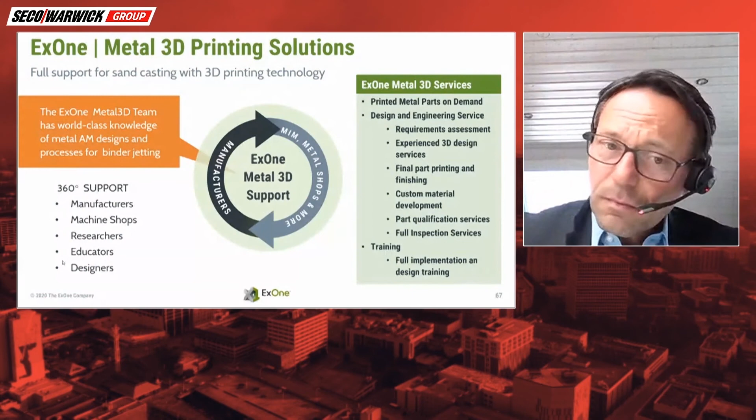And there are some risks linked to that. We need to face them and discuss them with the customers. Not every additive manufacturing process is easy to adapt. We know that, and we will give a helping hand to our customers, explaining if that's a good opportunity, or maybe they need to rethink and redesign the part to be binder jettable.

So it's important to understand that binder jetting and sintering belong together. The heat treatment is one important part of binder jetting. This is why today, with Seco Warwick, we're going to explain binder jetting in more detail, because sintering - and that means we need furnaces to do so - is so important, and doing that in a proper way.

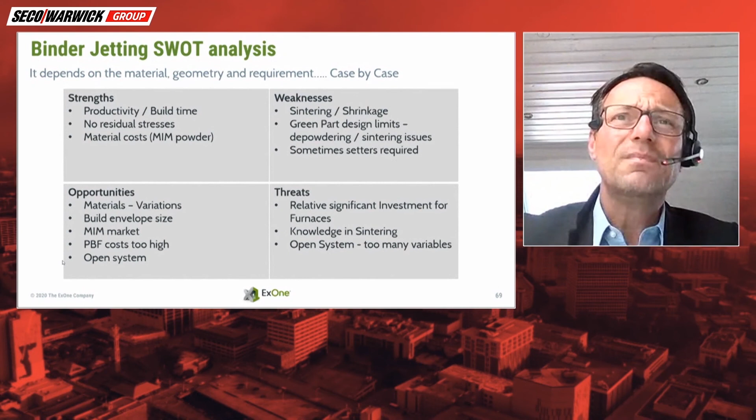If you have found a way to print a part, considering all the distortions and shrinkage, and prevent some distortions, then you can fix that process and produce a lot of parts in the same way, if you have a proper setup of machine and furnace. So in summary: great opportunities, but please consider it case by case, application by application. The design and the part really have to fit all of those process steps. It's not just 'oh, it's easy to binder jet' - you also need to think about how to depowder or how to sinter.

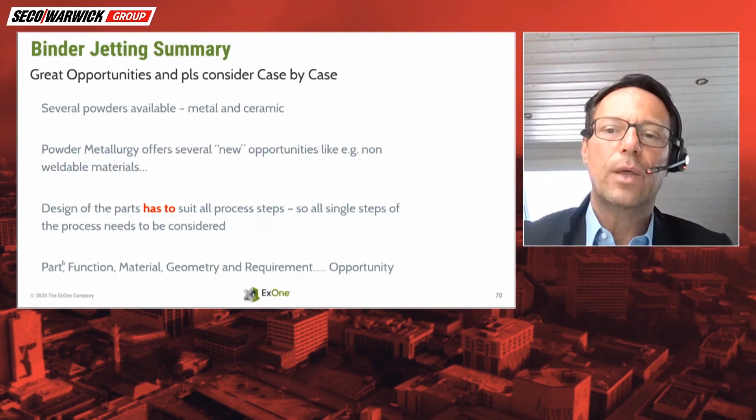Go through the process, think about it, maybe redesign, and then it's easier to do. But there are so many opportunities out there with binder jetting, and we are more than happy to help, to give you a helping hand, to give support, and have a discussion about your needs and the needs of the additive manufacturing community. So: part, function, material, geometry, and requirement - that ends up in a great opportunity if you find the right way through. Thank you, Richard, I hope that was in time for you.

Well, Oliver, thank you very much for a knowledgeable presentation. Me personally, I'm a huge fan of binder jetting, due to the fact that, as you mentioned, it always required a heat treatment, and this is the place where Seco Warwick can step in. So this is definitely a huge opportunity for Seco Warwick and the entire heat treatment community to make a contribution to the technology development.

So speaking about heat treatment and sintering, you mentioned that there are certain challenges that binder jetting is facing, like the shrinkage issue. Do you think that heat treatment can somehow help overcome those challenges for binder jetting in general?

I think we don't have to overcome it, actually, because the MIM industry has been used to shrinkage for ages. So it's not a very unknown animal. It's just the way you approach it. If you take it as it's given and you understand how to handle it, that's a challenge you can cope with. A bit more of a challenge is that we are still waiting for software.

We are waiting for software for prediction, how that shrinkage will work, how that will affect your part. But the good news is that there have already been people like Ansys, like Inspire, like Altair, starting to look deeper into the prediction, the algorithms which are necessary to predict a sinter process. So I think we are on the right way.